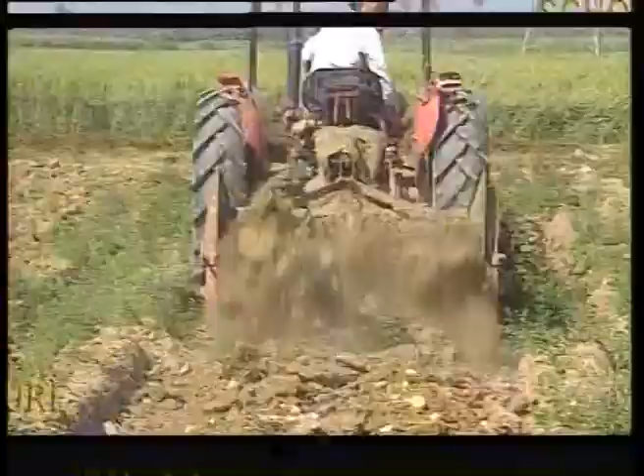What are the hygienic condition requirements for a food processing establishment? Those requirements will be dealt in this session. So I request Dr. Nath to explain the hygienic requirements for food processing establishments in detail, please.

The establishment where food is handled, processed, manufactured, packed, stored and distributed by the food business operator, and the persons handling them, should conform to sanitary and hygienic requirements, food safety measures and other standards as laid down in the regulations. In addition, the food business operator shall identify steps in the activities that are critical for ensuring food safety, and ensure that adequate safety procedures are identified, implemented, maintained and reviewed periodically.

So some steps or criteria are to be considered while setting up a food processing establishment. The first is the location and surroundings of the premises where you want to start your business or processing activities, which we call a factory. The establishment shall be located away from environmentally polluted areas and shall be free from filthy surroundings.

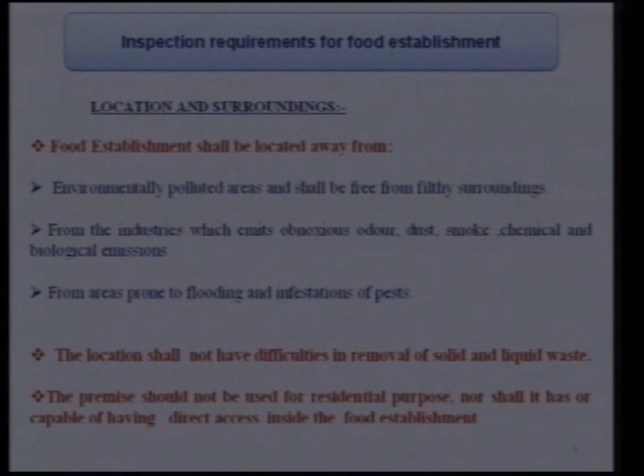That means the factory where food processing is to be established should be away from hazardous factories like those producing poisonous chemicals or leathers, which are injurious and repugnant to food products. The area should not be prone to flooding and infestation of pests, and the location shall not have difficulties in removal of solid and liquid waste, because in a food processing factory, particularly for fruits and vegetables or meat products, there is a lot of waste, and that waste should be properly and adequately removed from the factory.

So one should consider these factors while selecting a plant for setting up a food processing unit. If it is not an industrial area, there may be a small food business processing unit in a residential area. In that case, the processing unit should not have direct communication with the residential belongings or residential establishment, and there should be an independent entry or approach for it.

Then the layout and design of the food processing industry should be considered properly. The machinery and equipment installed in the processing area should not occupy more than 50% of the total area of the processing hall, for easy movement of workers and hygienic production. The machinery and equipment should be arranged such that they follow a linear flow of production; there should not be cross flow.

For example, in a canning unit, there are operations like washing of raw material, cutting, peeling, blanching, exhausting, filling, retorting and cooling. All these unit operations should follow a serial order in a line flow. There should not be cross flow, for proper movement of the workers.

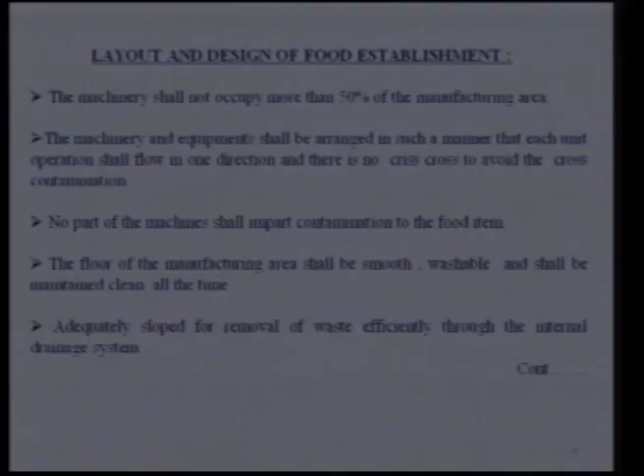The machinery and equipment should not be designed in a way that imparts any contamination or corrosion. No iron or galvanized iron is allowed for preparation, processing or storing of food products.

The processing hall should be designed such that there is proper drainage and removal of effluent waste, and there should be a proper slope in the processing hall.

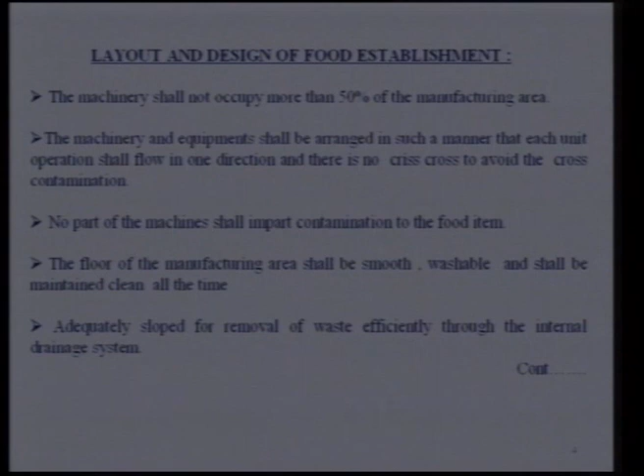The walls of the processing hall should be properly laid with stone or tiles, or properly whitewashed, and if possible, at least up to a height of 5 feet should be tiled or painted to make it impervious, that is, washable. This is because for some products like fruits and vegetables, there is a lot of dust while performing unit operations like pulping and cooking, and this material adheres to the wall. So at least 5 to 6 feet height of the wall should be tiled or oil painted.

The ceiling of the processing hall should be of a permanent nature, and designed such that it has a smooth surface. There should not be accumulation of dust, dirt or condensation.

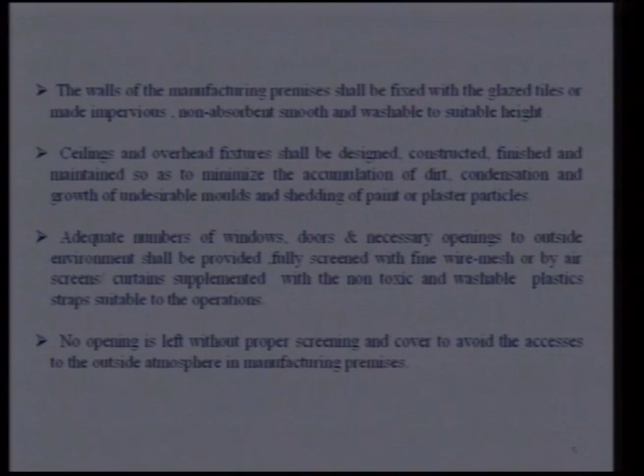An adequate number of windows, doors and ventilation should be provided in the processing hall, and all doors, windows or any openings should be properly fly-proofed with nylon or iron nets. There should be an automatic door closer on the door, so that it automatically closes and opens, preventing entry of flies and other pests, because in food processing industries there are a lot of flies due to the nature of products like fruits, vegetables and others.

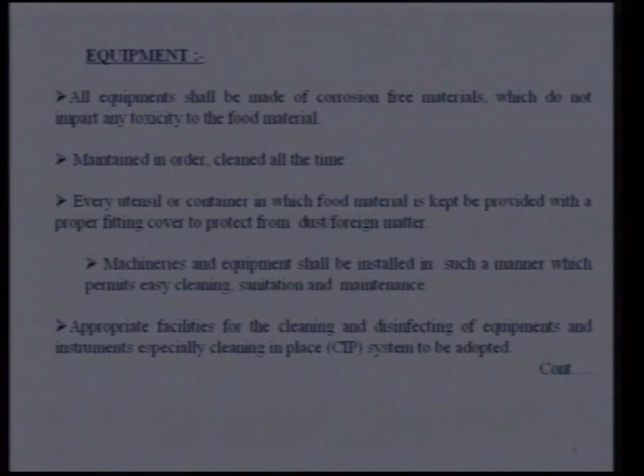Then equipment should be designed in such a way, as I already mentioned, that it should be corrosion free, and it should be maintained in order. It should be designed in such a way that it can be easily cleaned, and machinery and equipment shall be installed in such a manner that permits sanitation and maintenance, with appropriate facilities for cleaning in place for certain industries like milk processing, the dairy industry and other industries. Where there is an automatic plant, a CIP, which is called a cleaning in place system, should be adopted, so that there is no chance of contamination inside the processing or pipelines.

And then equipment and containers for waste, byproducts and inedible material should be marked and identified so that there is no chance of contamination. Chemicals and other dangerous substances used for cleaning shall be properly labeled so that they are properly identified, and they should be separately stored.

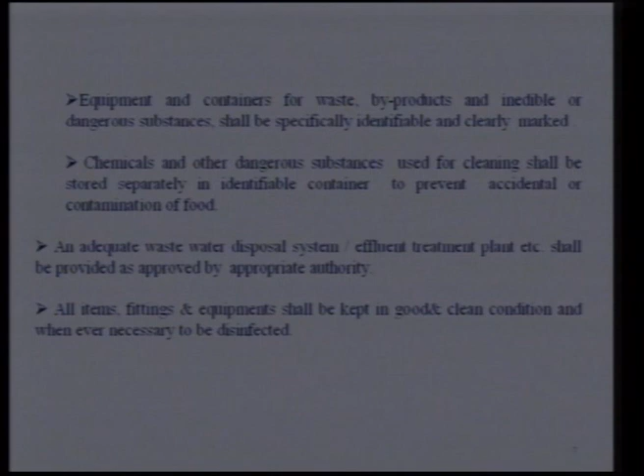And adequate wastewater disposal. I have already mentioned the food processing industry is a very water intensive industry, particularly fruits and vegetable or meat processing, so the effluent and wastewater disposal system should be properly designed and appropriately maintained. All items like fittings and equipment shall be kept in good and clean condition, and whenever necessary they should be disinfected. Then some other facilities like water supply, because water is a very important input in the food processing industry, particularly fruits and vegetable and meat and fish processing industries.

And water is used not only for cleaning of raw material like fruits and vegetables or meat, but water is used in many products as an ingredient, particularly fruit juices and canned fruit. So the water used should be potable, that means it should be fit for drinking purposes, and potability should be as per Bureau of Indian Standards, and the water should be chemically and bacteriologically analyzed before the start of the industry and once a year for its potability.

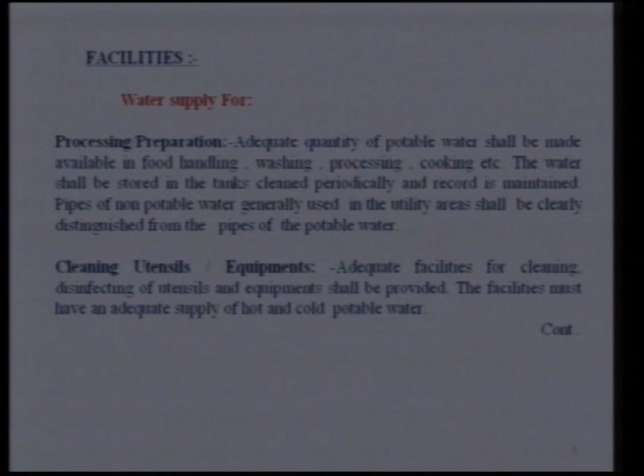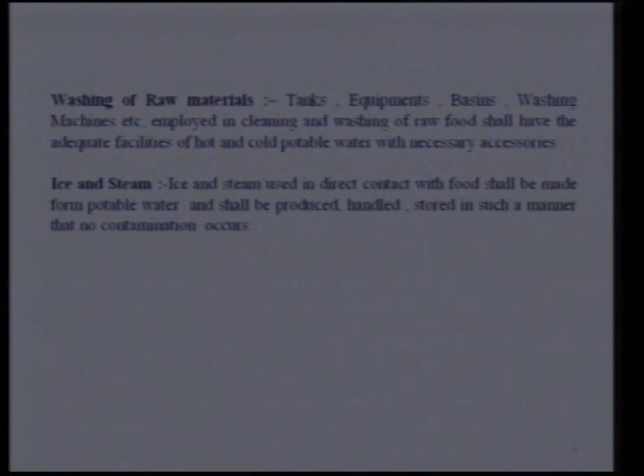Even for cleaning of utensils and raw material like fruits and vegetables, drinking water should be used. And the same for water used for ice and steam. Ice is used for many foods, so for ice making also the water should be of potable quality. I have already mentioned that there should be adequate drainage and disposal systems wherever necessary. The waste material should be kept in the processing hall in a covered container, and there will be proper disposal systems.

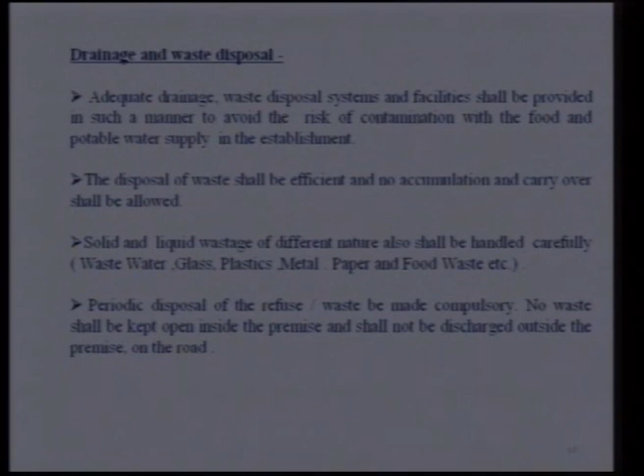Wherever necessary, an effluent water treatment plant (ETP) should be installed, and waste material like broken glass and plastic materials should be carefully handled and disposed of, so that it does not pose any hazards and contamination. Personal facilities and toilets.

This is also important. The workers and other personnel working in the processing hall, both female and male, should be provided with adequate toilet facilities. The toilets and wash basins depend on the number of workers. Generally, for every 25 workers, one toilet and wash basin should be provided. If there are 100 workers, at least 4 toilet and wash basin facilities should be there, and the toilets should be away from the processing hall. There should be no direct connection to the processing hall, and there should be an adequate facility for a change room or refreshment room for the workers.

Air and ventilation: I have already mentioned there should be proper ventilation, and for fresh air, an adequate number of exhaust fans should be provided in the processing hall. Also lighting facilities, because lighting is required for various types of preparation, processing, and also inspection purposes in the processing hall. So the intensity of light should depend upon the nature of work.

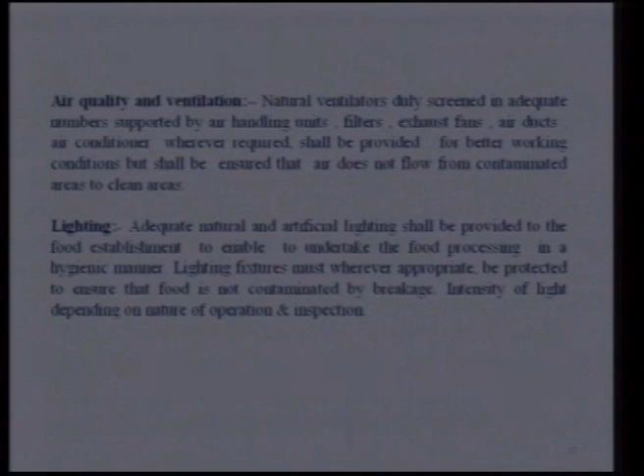Then food operation and controls: the procurement of raw material. This is very important for any food processing, because if you do not take care in procurement of proper raw material and the source is not proper, then the products manufactured will not be of good quality. So one should be very careful while procuring raw material, and also in maintaining adequate temperature and other conditions of the transportation or storage container. For example, milk is procured at the rural and cooperative level, and then it is transported a long distance to the processing unit.

So at the procurement stage itself, there should be a proper facility for chilling and cooling of milk, a bulk cooling center, and temperature is also important. Milk is a very highly perishable product, so at the procurement level the temperature should be maintained at 4 to 5 degrees centigrade. It should not exceed 5 degrees centigrade, and during transportation also it should maintain this temperature until it is processed and pasteurized. So procurement of material is very important.

And additives and ingredients, wherever applicable, shall conform to the regulations and standards. This raw material should be properly tested as per its standard, to check whether it is as per the standard. For example, even for fruits and vegetables, whether they contain higher limits of pesticide residues and other adulterants like unpermitted colors or any other additives.

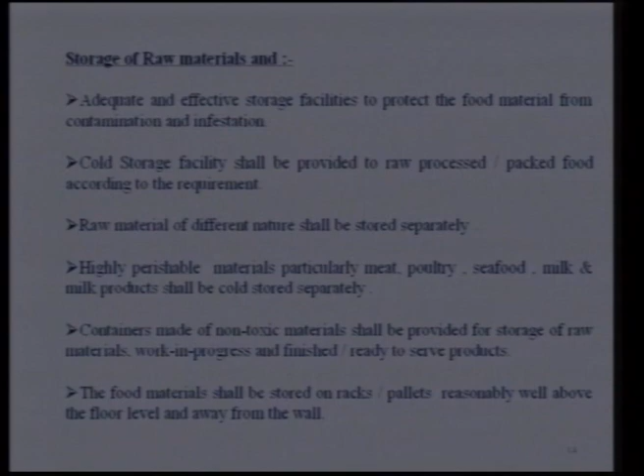And for products like meat products also, meat is a perishable item. Many units don't have a slaughterhouse, so one needs to transport raw meat from the slaughterhouse to the processing unit. There also proper temperature should be maintained. A refrigerated van should be provided for transportation of raw material like milk or raw meat.

And the container used should be non-toxic, and it should not contaminate the product. This care should be taken. And in storage, even raw material should be properly stacked, reasonably above the ground and also away from the wall, so that no damage occurs to the raw material.

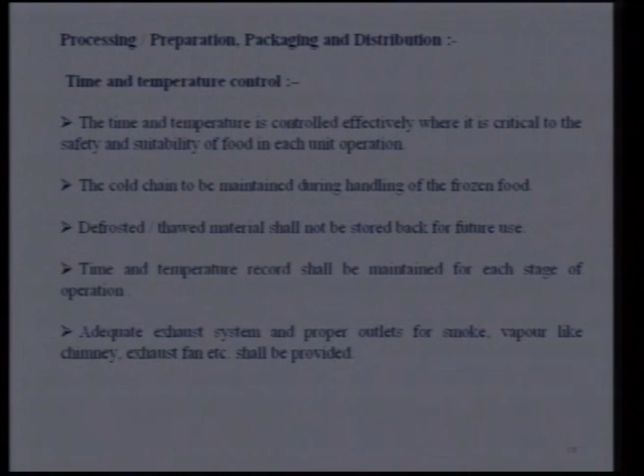Then precautions to be taken in processing and preparation of the products. There is time and temperature control during processing, and also other precautions like using the working table. One should not cut, peel, etc. fruits and vegetables on the ground. There should be an aluminum top table. Workers should work on the table only for cutting, peeling, and other preparation. And as I already mentioned, cold chain should be maintained for frozen products, and time and temperature control during processing.

Then food packaging. Packaging plays an important role in maintaining quality and increasing the shelf life of the product. So packaging material should be non-toxic, and it should meet the BIS standard of food grade quality. Packaging materials or gases, where used, shall be non-toxic and shall not pose a threat to the safety and suitability of food under the specified conditions of storage and use. So this care should be taken while selecting a packaging material for particular products.

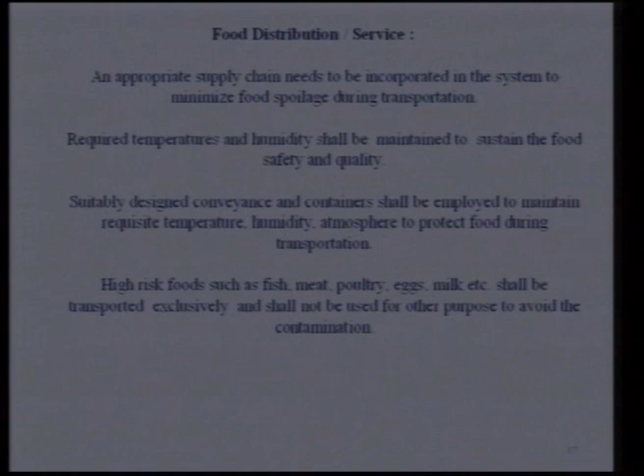And food distribution and service. Adequate care should also be taken during the supply chain. As I already mentioned, for products like milk or meat products which are highly perishable, the transportation should be suitably designed, maintaining requisite temperature, humidity, and atmosphere to protect the food during transportation. High risk foods such as fish, milk, poultry, eggs, etc. shall be transported exclusively and not along with other products to avoid contamination.

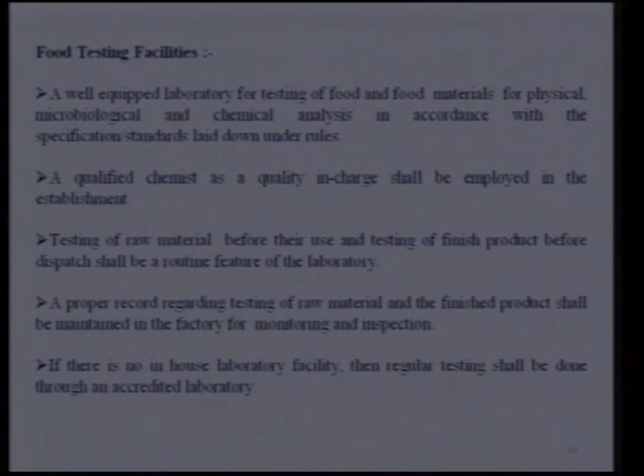Then food testing facilities. Every manufacturing unit should have a food testing facility at the plant level. If this is not available, at least minimum testing facilities like testing of acidity or total soluble solids, or total fat content or SNF in case of milk, should be there in the factory. If it is not available for a small unit, then the product or raw material should be tested in another accredited or recognized laboratory to ensure the quality standards laid down in the regulations. And this testing should be done regularly.

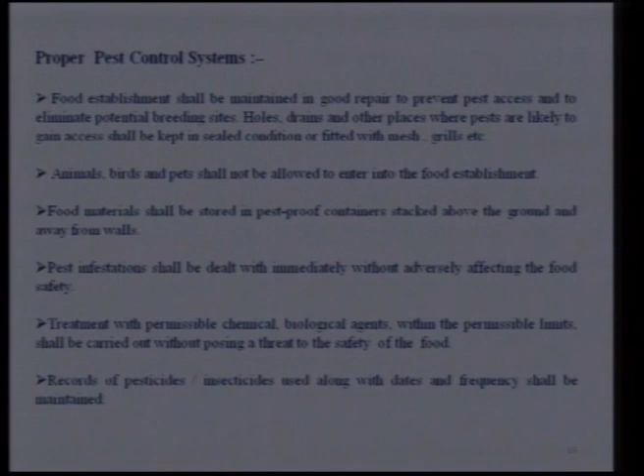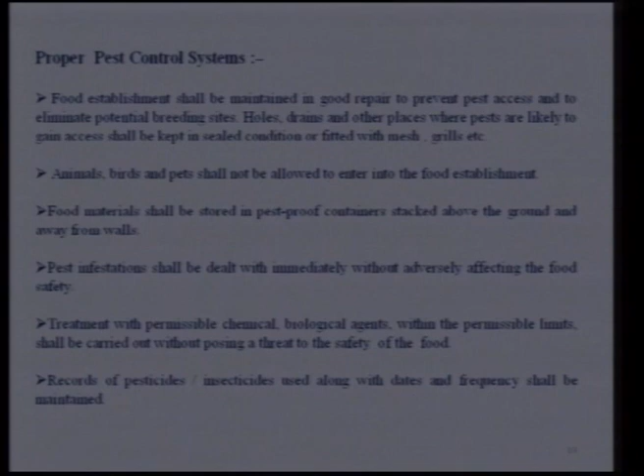Proper pest control system, I already mentioned, in raw material or finished goods storage. Pest control measures should be taken, like provision of rodent baits or rat traps. All openings for drainage or other things should be properly covered so that rats and rodents do not enter the finished goods or raw material storage. And records of the pesticides and insecticides used, along with dates and frequency, should be kept, because treatment with chemicals and biological agents, whether within permissible limits or not, should be checked regularly. So in storage, pest control measures should be taken adequately to avoid any chance of contamination.

Sanitation and maintenance of establishment. For cleaning and maintenance, one should chalk out a well planned program for regular cleaning. For example, during processing, every 2 hours the floor should be cleaned properly and disinfected with bleaching powder or chlorinated water to avoid any type of contamination. And from the processing hall, at regular intervals, the solid waste should be removed and disposed of suitably away from the factory premises.

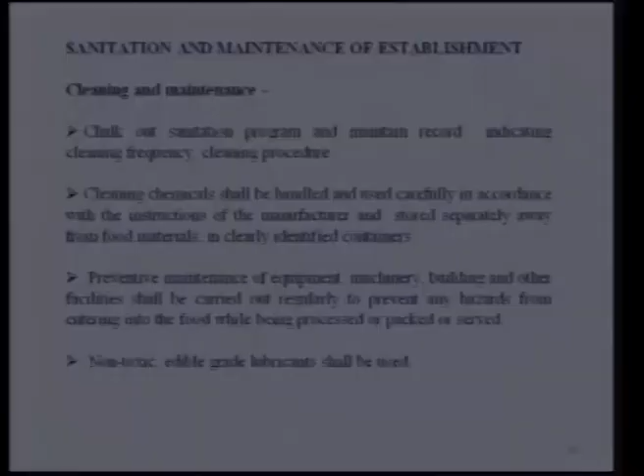And preventive maintenance of equipment, machinery, building and other facilities shall be carried out regularly to prevent any hazards from entering into food while being processed, packed or served. So these steps should be taken, and there should be a proper facility.

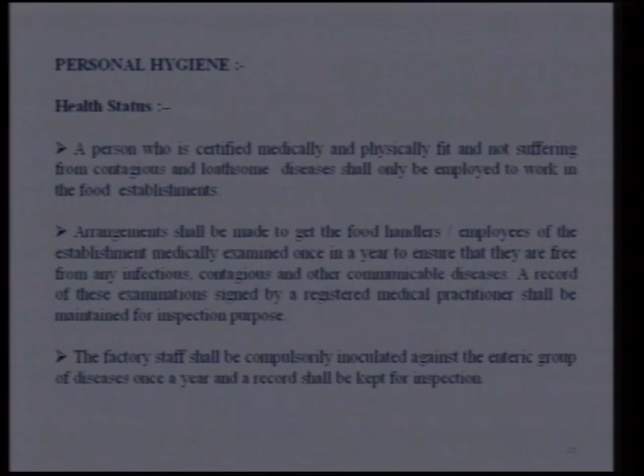Then next important is personal hygiene. The workers engaged in the processing hall or food processing should be free from any contagious or infectious diseases. They should be medically examined, and such medical examination records should be kept in the factory.

Arrangement for proper hygienic measures, like the worker should be provided with neat and clean aprons, headwears, hand gloves, and footwears, and care should be taken that workers properly clean their hands, foot, and even cut their nail or hair regularly, because these also are the sorts of contaminant in the food product.

And the workers should be provided with wash basin with soap, so that whenever they go out for toilet, they should wash their hands before re-entering the processing hall. So all these arrangements should be given, and supervisor or the management should see that workers engaged in the production hall maintain all appropriate steps of food safety measures. There are some personal behaviors also during production.

Management should see that the workers engaged in the production, there are some behaviors like sneezing or coughing. They should not do this in the processing hall. And bad habits like chewing of pan or tobacco, or scratching their beard, ears, etc. They should not do during preparation and other handling of foods. And they should effectively wash whenever they go out and enter the processing hall.